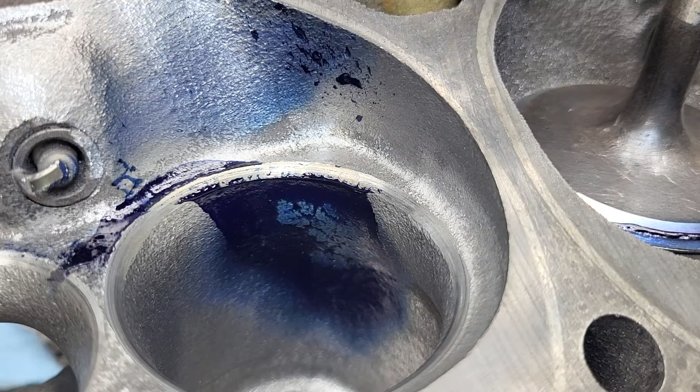Alright guys, phase 2, or second cut. 193 heads, 2021 6s. Basically the ports haven't been touched. I cut for bigger valve sizes and blended it into those sizes. I did do a little more work to the chamber because when I put the bigger valve in...

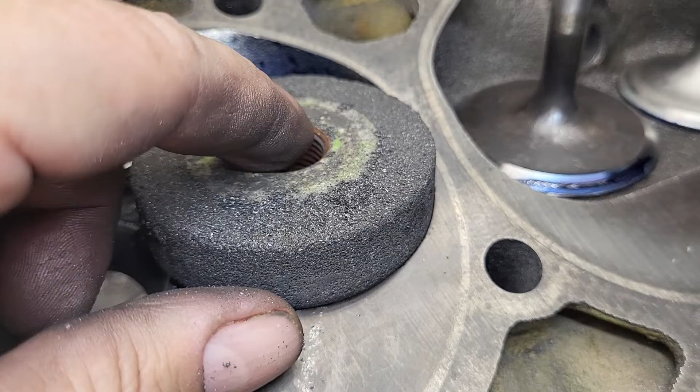I do a plunge cut with a big stone. It's got my top cut angle and a radius on it. It may be a little chewed up right now, but you get the idea. Then you just have to finish the chamber a little bit with the burr. Believe me, I did not waste a lot of time making it pretty, but it does take a good size piece out right here for the bigger valve.

Now I won't be able to open that up anymore when I go to a 2055. It is possible that the 202 works better than the 2055. I don't know, I'll find out when I cut it. I do think our liquid is really telling us a story at this point. Check out the angle on that.

By the way, we talked about the swirl port, but in technical terms it's a high helix swirl port. High helix means the amount of twist that the screw inside the port has. Now I haven't changed that much, in fact it's pretty much exactly the way you guys saw it last time.

I did do a little work at the bottom of the bowl, making it a little bit bigger for the bigger valve, but not much. I did have to go through with the sonic and make sure it wasn't getting thin in any spots. It's still pretty good, but I'll really probably have to watch it when I go to the bigger valve. It starts to get thin right under here, right about here is where it looks like it's going to be a problem.

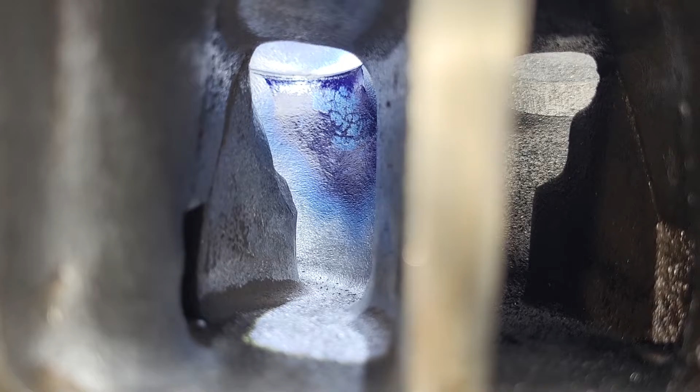Pretty cool. Now remember, I haven't opened this port up. I'm going to straighten that wall out after I go to the bigger valve. I think phase 3 is just going to be opening this up to a 2055, and maybe I'll polish the short side on the exhaust and we'll test it that way.

The short side did have to get some more work because I wound up bringing that out quite a bit for the bigger valve. You can see it's not my usual quality because it's just the testing phase, I'm doing it as quick as I can burr it out. Even at that, it was still probably an hour and a half to do two.

It was probably more than 1.5, probably 2 hours just to do 2 seats and grind the bowls in. Okay, the exhaust port is basically the same, just radiused in.

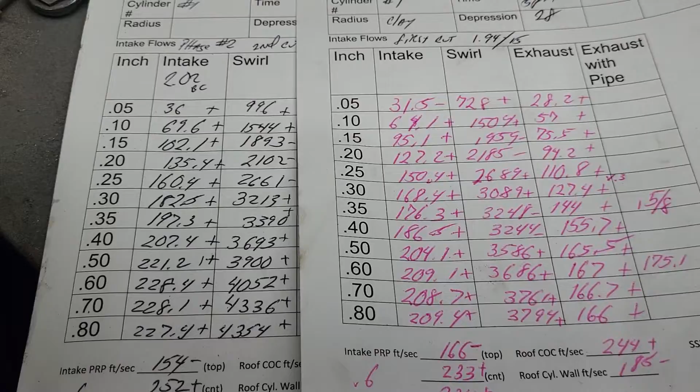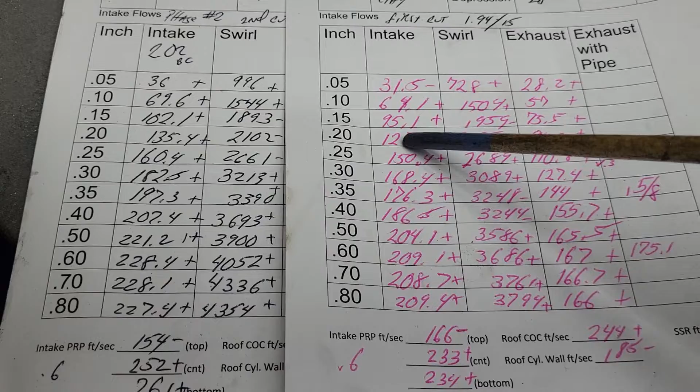Run it. Okay, first cut, pink, I know it's your favorite color, versus second cut. How'd we do? Remember, this is going from a 194 intake valve with a back cut to a 202 with a back cut.

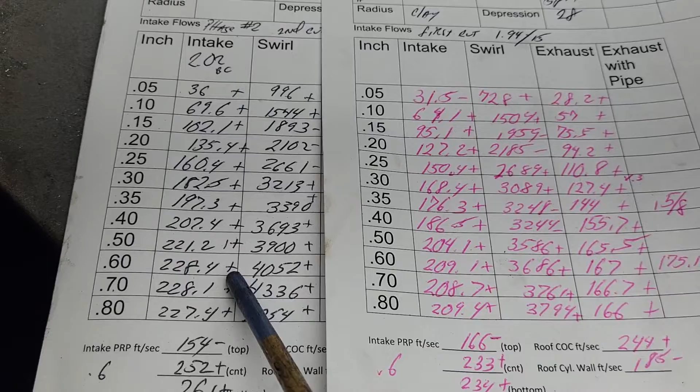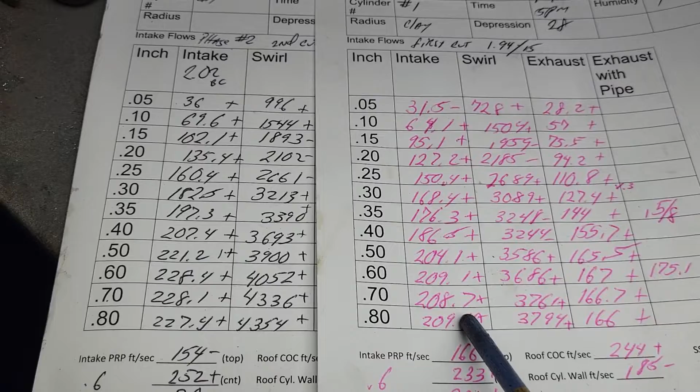I'm pretty sure it liked it, and the gains aren't small. In usable range, we got 20 CFM. Not bad. By the way, somebody made a good point that first cut with a 194 is as good as a 202 Fuelie that's not ported.

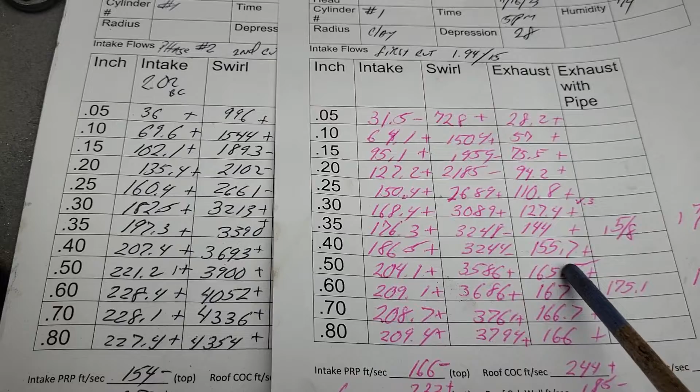Actually, a little better on the exhaust than a 202 Fuelie. So maybe they're not as bad as people say after all. I don't know, it's a possibility. What do you think? We're a little low at 300.

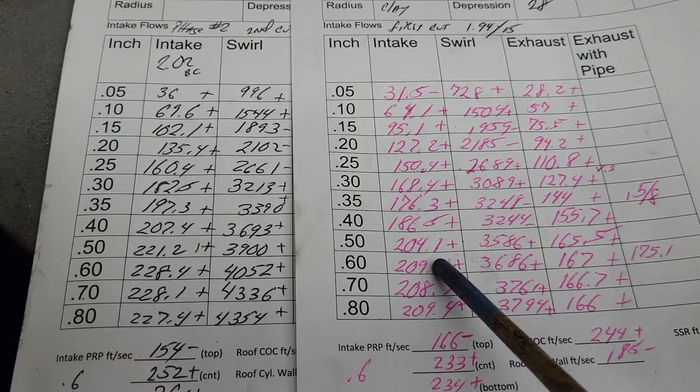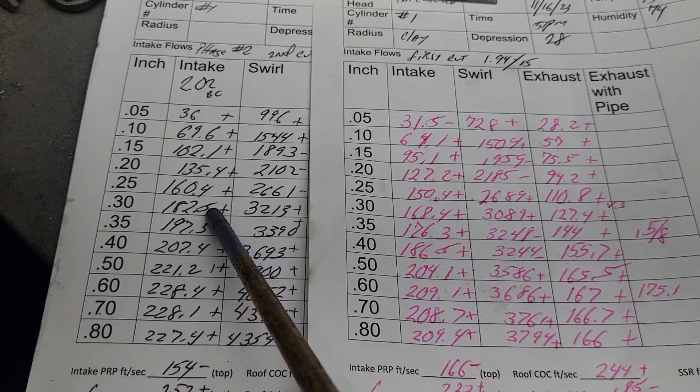I would like to get that, my go-to number at 300 is about 200 CFM. That's what you should be seeing with a decent-sized valve. Okay, let's take a look at our air speeds across the pinch.

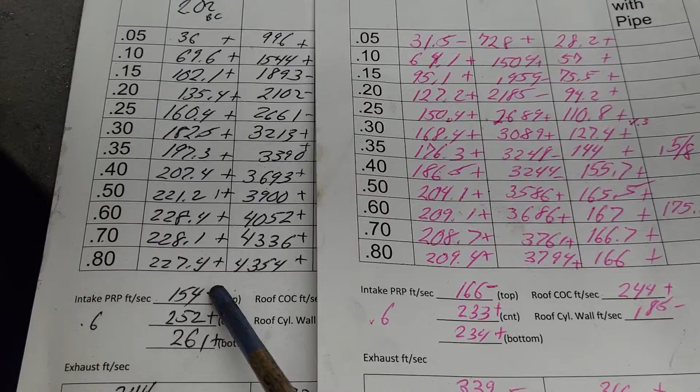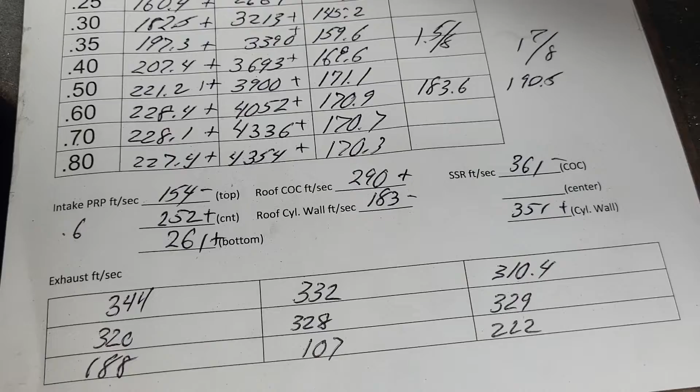Minus, plus, plus. Okay, decent gains, but didn't change much on the roof. Interesting, as far as our roof speeds, we got a big jump up center of the cylinder. Now remember, center of the cylinder is this side.

I'm surprised there's so much dirt in here. I hope I didn't flow that with that dirt sticking there. I'm gonna guess that's what that was. I thought I did a good job cleaning, but I could have goofed up. See, one thing it's interesting with the swirl ports is you can't just blow the dirt out of the port, because if I blow down the port this way, it picks up the garbage and it throws it right into my face. Not cool.

So it looks like those flows had some dirt in the swirl port. But it's interesting how much air wants to come off of this side, the roof, and the floor versus this side, okay?

Now remember, you can only go so far. You can't make this too thin. You need to get rid of the heat of the valve. All right, so you can bullet nose it quite a bit towards the tip, but you're still going to need some meat on this side.

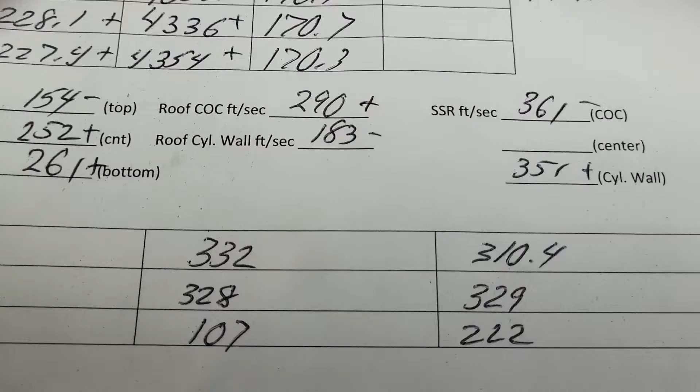And our short side radius speeds, this is what they were, and that's what they are. They went down a little bit center of the cylinder, and went up to cylinder wall side. But they're more even now. Okay, means it's happier. Let's take a look at the exhaust.

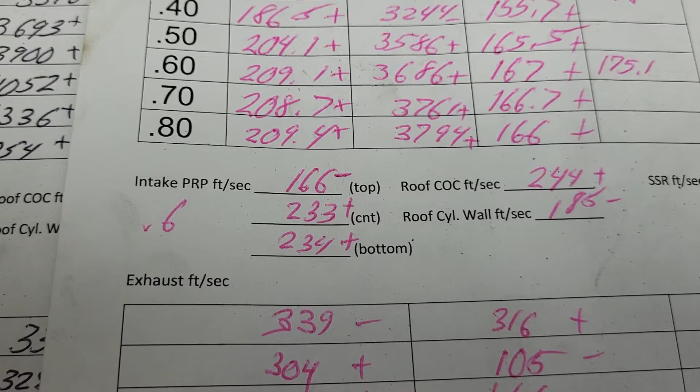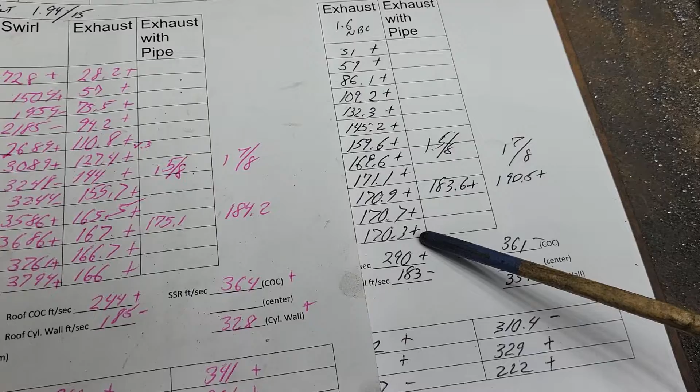Okay, exhaust is interesting. Now all we did is went from a 1.5 to a 1.6 and radiused the bowl in. Did it like it? Looks like it. Interesting point, we didn't top out much better. So what that's telling me is we're getting basically port saturation for the CSA we have. We're putting about as much air through as we can.

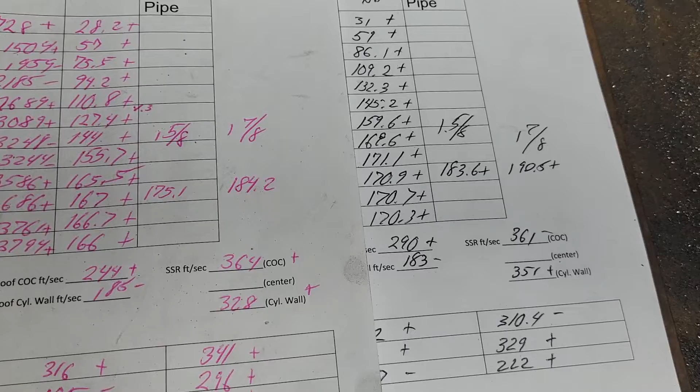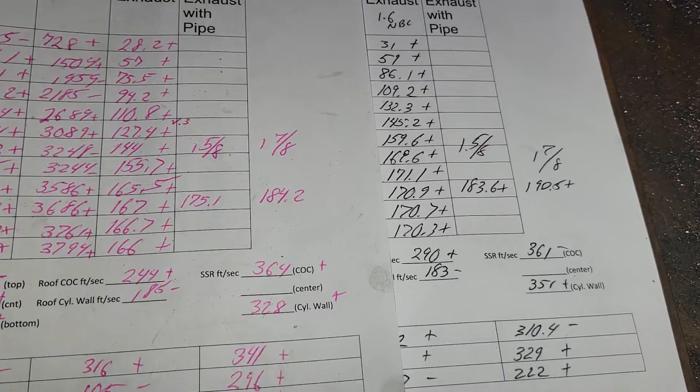Remember, the port's still tiny. And if it's going to be a street application, you really want a tiny port. Now, I'm not saying these are going to stay a tiny port, because we want to get some serious RPM out of these, which is not going to be easy due to our intake flows, which aren't great yet.

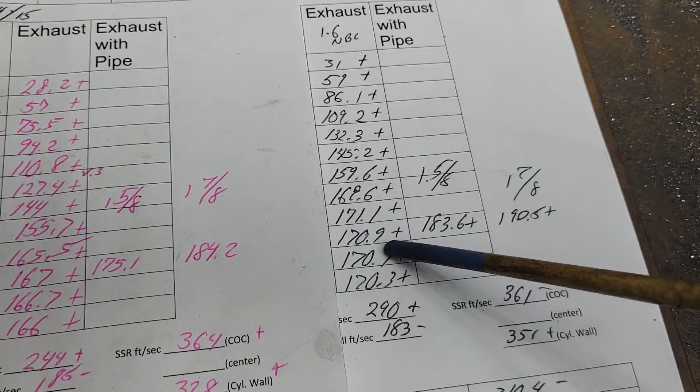I'm going to have to put a bigger exhaust port in this. I do have to watch the casting thickness. It's not the thickest casting in the world, but it's very heavy casting.

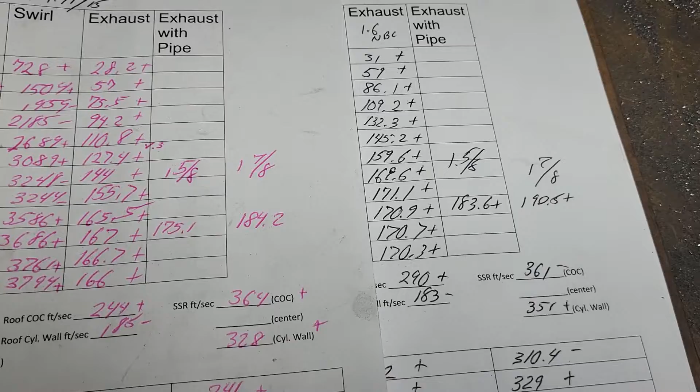All right, let's take a look. As far as inch and 5/8 pipe, we went up. Inch and 7/8 pipe, we went up. It's not bad where it sits right now, and remember, it has a rough short side still.

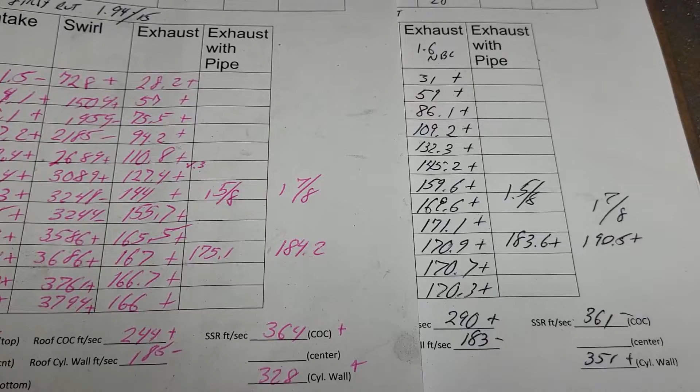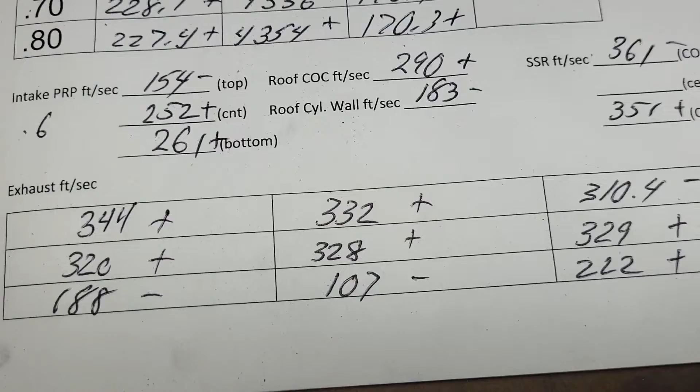So what I think I'm going to do is due to our air speeds - all right, these are our old air speeds, these are our new air speeds. The air speeds actually improved a lot. Take a look at how much they went up right in the center.

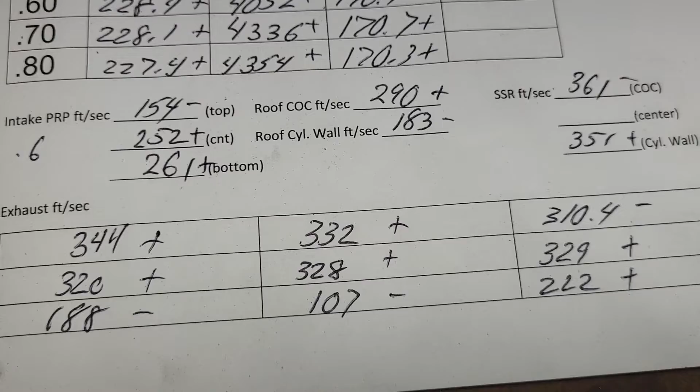It was 105, it was really low. It went up to 328. Okay, the port overall is way happier. I had a feeling going to the bigger valve would even a lot of that up, and I was right.

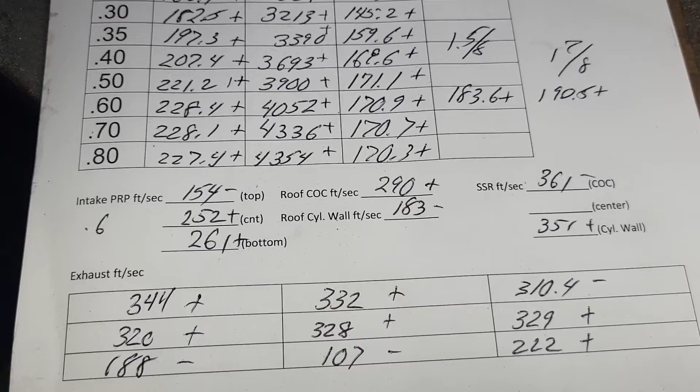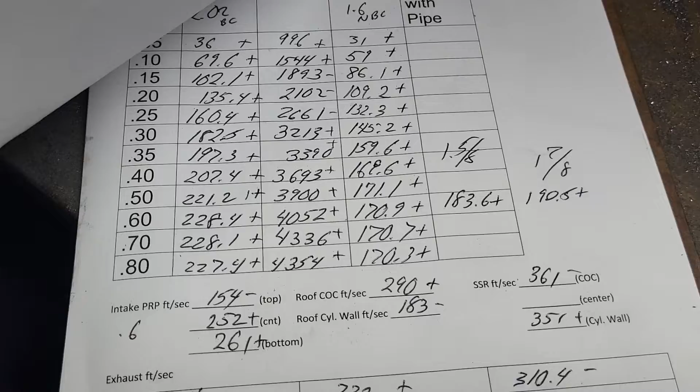After I polish the floor, I hope to get that dead spot on the floor to improve a little bit. We'll see, we'll check it out, and it'll either work or it won't. I mean, chances are this will get completely polished exhaust because we're going to have to squeeze every ounce we can out of them.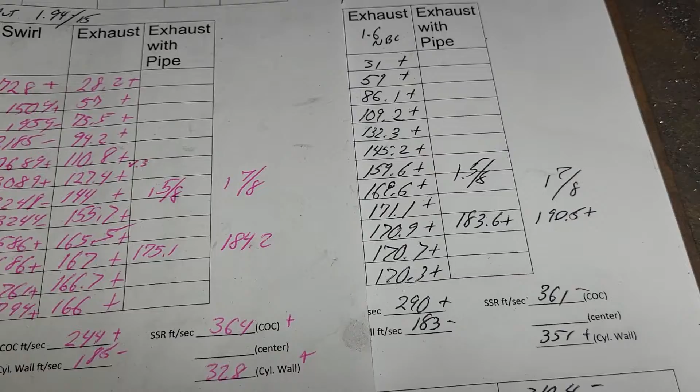All right guys, what else do we need to talk about? Oh, you know what? Let me get a little bit different view of that bowl view.

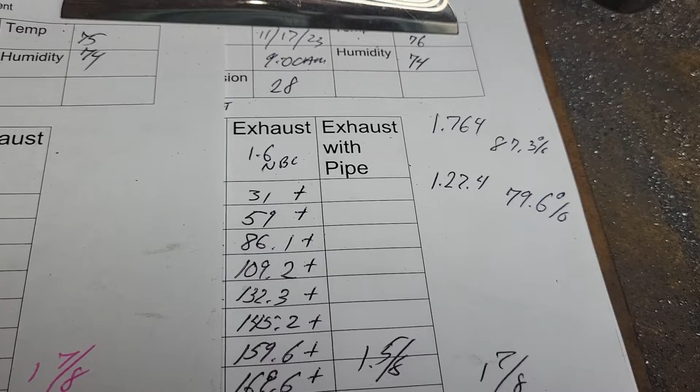Okay, I think this is kind of interesting. You can still see part of the bowl that really hasn't even been touched. I should check out what our throat ratio is. I bet our throat ratio is pretty tight on both of these. All right, our throat ratios are really tight. Doesn't matter, I'm not fiddling with it at this point. We're going to go up in valve size, and then we'll worry about throat ratio later. But overall, with such tight throat ratios, they still work quite well, so we'll keep that in mind.

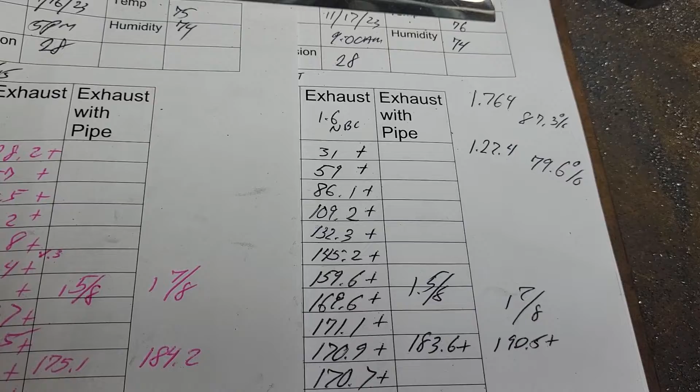Remember, I like my throat ratios right around 88 and 86 — 86 for the exhaust. Almost forgot to show you the bore. All right, let's get there.

Okay, the bore is starting to look very different from what we originally had. You can see how tight an angle that air is pouring in from. It's interesting stuff, guys. I really like the swirl ports. It would be nice if I could figure out a way to get some decent power out of these. I think this is a fun project — got to stretch your brain a little bit, and believe me, my brain needs some stretching.

Alright guys, 12 minutes in. Let me think if I need to tell you guys about anything else. Alright, I'm drawing a blank.

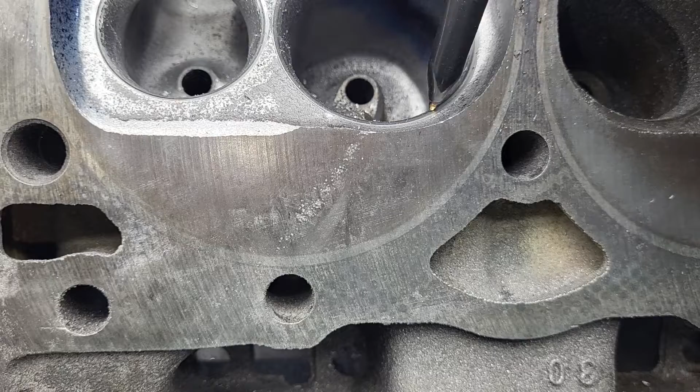So I guess I should add in, I did put a little bit of a plateau on that exhaust, because I don't like the sharp edge, which is basically the way I did it back in the 80s. I kept this tight — basically this is cut with the stone. All right, bring it out pretty close to the gasket line with the stone, blend it out, but I kept it tight on this side because the original design was like that, and I was afraid of taking too much away. Remember, the more you get on this side of the short side, flow will go against your swirl, which we didn't even look at our swirls. Let's take a second and look at that.

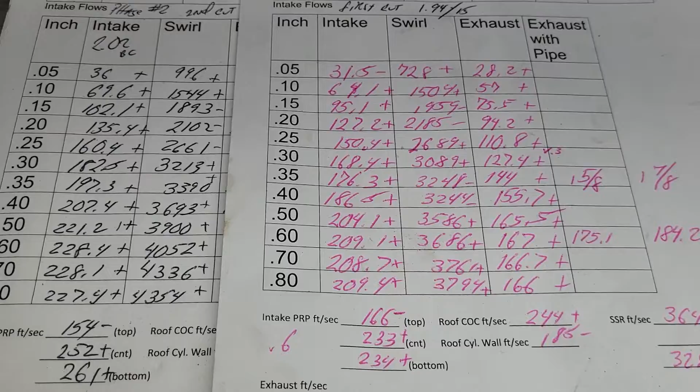Oof, okay guys, sorry about the swirls — at least I didn't finish the recording. Here's our swirls: plus, plus, minus, minus, minus, plus, plus, plus. We're breaking 4,000 at this point.

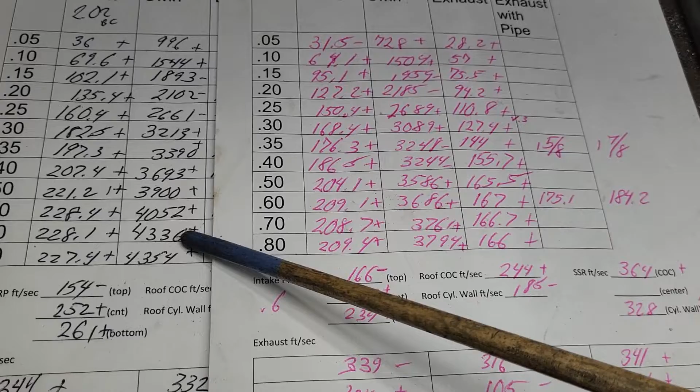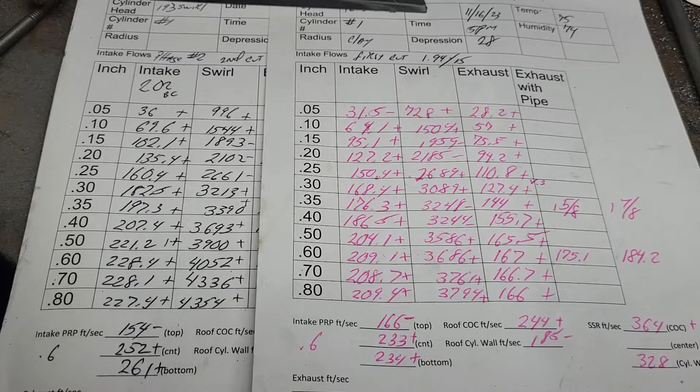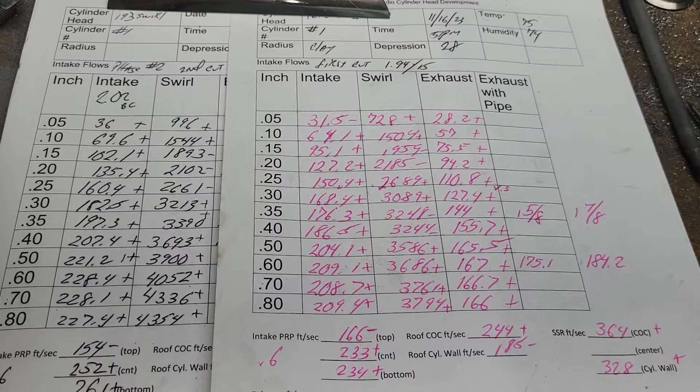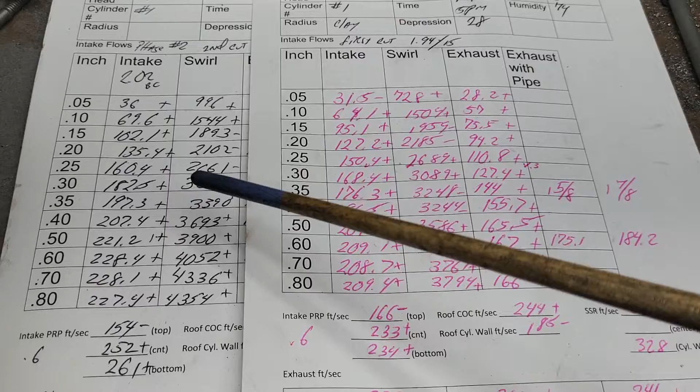And it reminds me of something my friend Nicky said. Nicky owned the machine shop I used to basically live at when I lived on the island, and I told him about this plan — actually it was many, many years after I had done it, because he had a throttle body injection Suburban with 260,000 miles on it, never touched, with like 35-inch tires, so it didn't have an easy life. He had 6 kids. So when I told him I put the 2.02 valve in it, he goes, 'man, that thing must swirl like crazy.' He was a very intuitive guy, very smart guy, and sure enough, it looks like he was right.

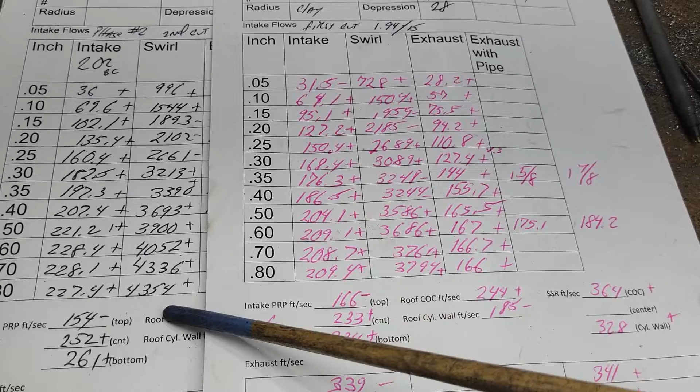All right, as you're shrinking down the chamber, take a look — this is what the chamber looks like with the 202, okay? Notice how much tighter we are in these areas. This piece here is a mistake, that should actually be filled in, you know? But that's the way they cast it, so that's what you're stuck with.

So as you bring the valve out, it makes it harder to get the air out on this side, right? Now you have to wonder what that does. Well, it's going to keep the air in the bowl more and exit more on this side, so it would more than likely increase our swirl even more. Now, is it bad to have stuff at 4,000 RPM?

Well, I remember when I first tested my bow ties, and those were cut probably around the early 90s, and they ran really well, even though they didn't flow that great — they only flowed 282, and they were up around 4,000 RPM swirl. And got to remember, bow tie is a straight port, but when I do my Fuelie chamber cut in the bow tie, that helps the swirl. They were a very responsive head — a great street head, those bow ties.